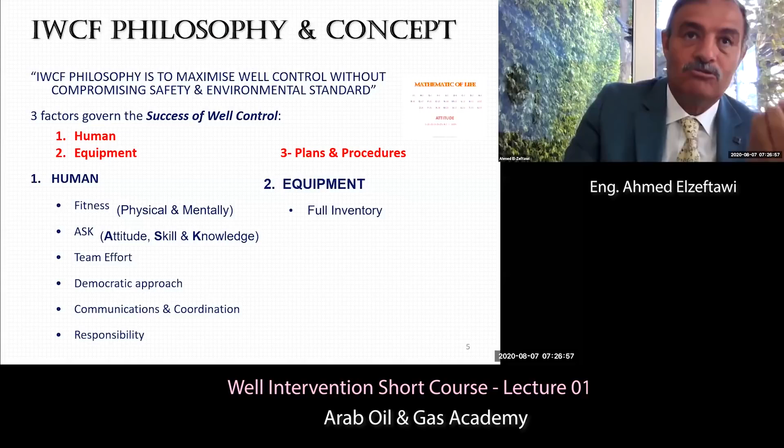If you still remember, we were talking about the three ways to keep good well control. We said number one is human, number two equipment, number three is plans and procedures. We talked about human quickly because of the time limit, and now when we talk about the equipment, I will not go through all these topics, but I need you to know that the equipment has to be in good shape. While going to the field, you have to know what you have.

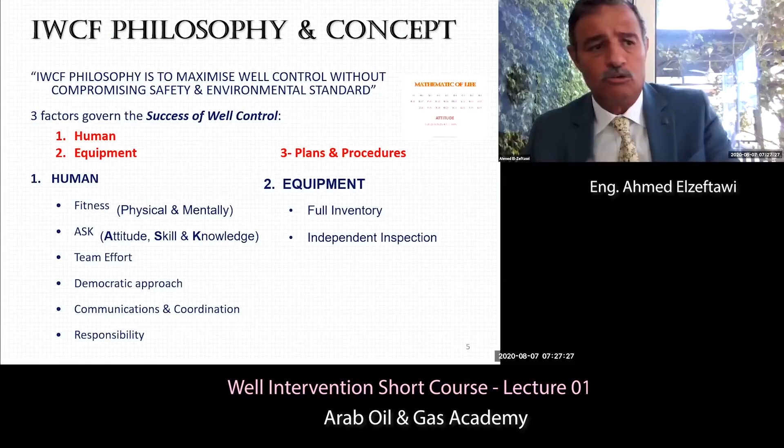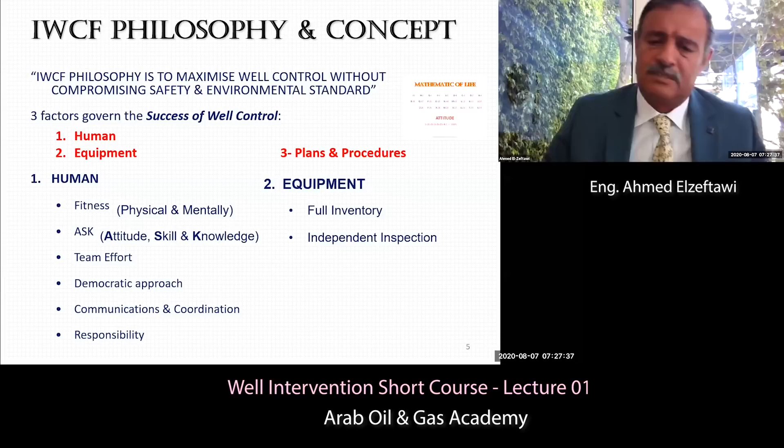And the equipment has to be inspected, not by you or by your friend or by a colleague, but your equipment has to be inspected by a certified inspection company. We inspect equipment against pressure test, we inspect all equipment. I'm talking about slings, about shackles, escape sets, breathing apparatus, fire extinguishers.

All these have to be inspected to be sure they are working correctly. I remember one day in the past, a service company sent the equipment to the location, ready to do the job. And before they did the job, the company representative went to the location to inspect the equipment before they started rigging up.

So the company man went through the equipment, and at the end he went to the supervisor and told him, thank you very much, please take your equipment and go home. And the guy was surprised because he hadn't made any mistake yet. He didn't even start the job. So what's the problem? We found it in the report that the company man sent to his manager.

He wrote that while checking the equipment on the ground, he found, I don't remember how many fire extinguishers on location, but let us say 8 fire extinguishers. He said that there are 8 fire extinguishers on location, but none of them is working, although all are certified. Certified means they have been inspected and they stick the stickers on the fire extinguisher that it has been inspected, and the next due is after 6 months.

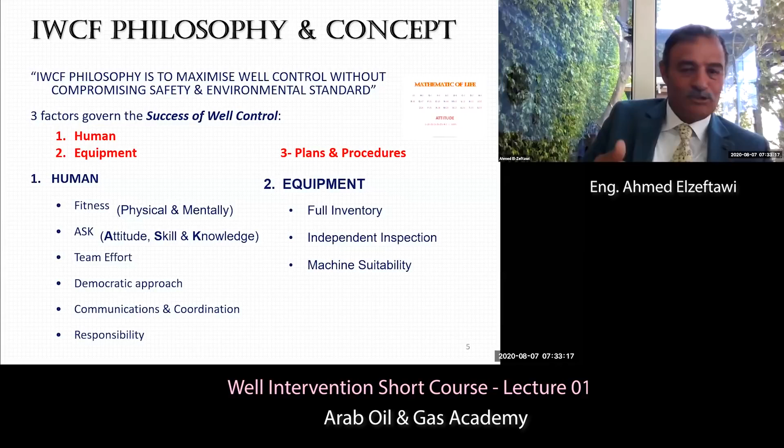Plans and procedures. You have to have a plan. That's why we have a program. When we do a job, we know exactly the steps, the 20 steps or the 30 steps we are going to do. And we have to have a backup plan. What if the original plan didn't work? What are we going to do? You always should have a backup plan.

We're going to pressure test and run in hole till we reach 12,000 feet. Then we're going to mix acid and inject it, pump it into the well. What if you mix this acid and you run in the hole and at 7,000 feet you cannot go through? What are you going to do with this acid you mixed already? Are you going to drink it? Throw it into the sea? You have to have a backup plan.

And these procedures you make are not a Bible or Quran that you have to implement in every well. Every well has its own characteristics, and every well has to have its own job procedures.

I'm going quickly because of time limitation.

Now we come to the barrier, which is the core of today's topic. What's the barrier? What kind of well service disaster could happen caused by pressure? And by the way, well intervention is about this word, pressure, P-R-E-S-S-U-R-E. If there is no pressure, then we have no problems. We can live safe. But pressure is behind every problem that happens in the oil field.

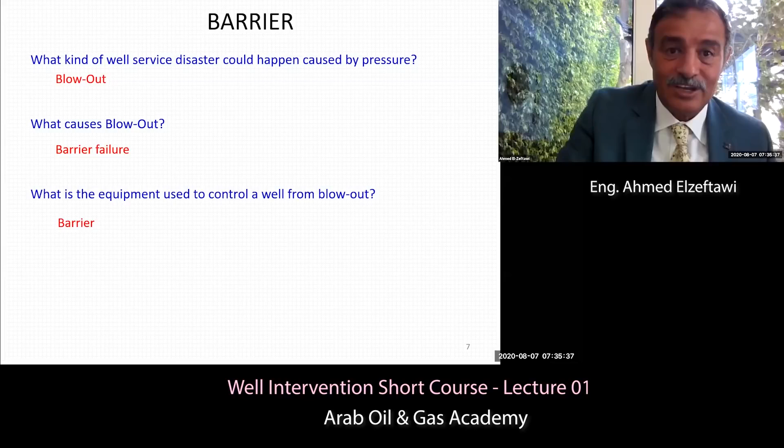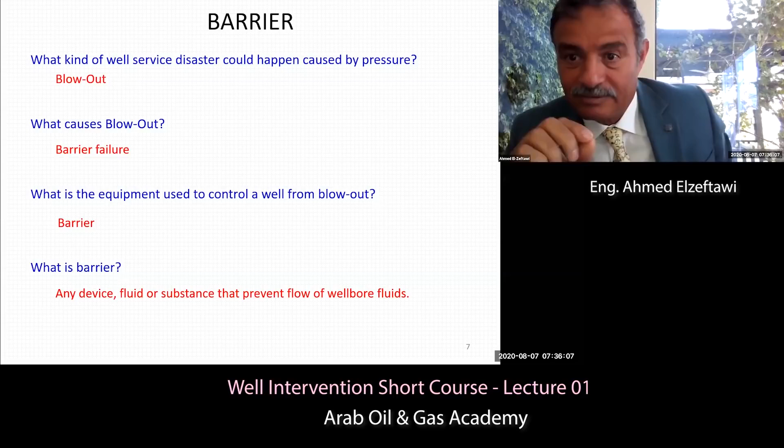What can pressure cause? It can cause a blowout. What causes a blowout? The barrier you selected didn't do its job, failed to do its job. What's the equipment used to control a well from blowout? Barrier, of course. What's the definition of a barrier? Any device, fluid, or substance that prevents the flow of the wellbore fluid. Please highlight prevent.

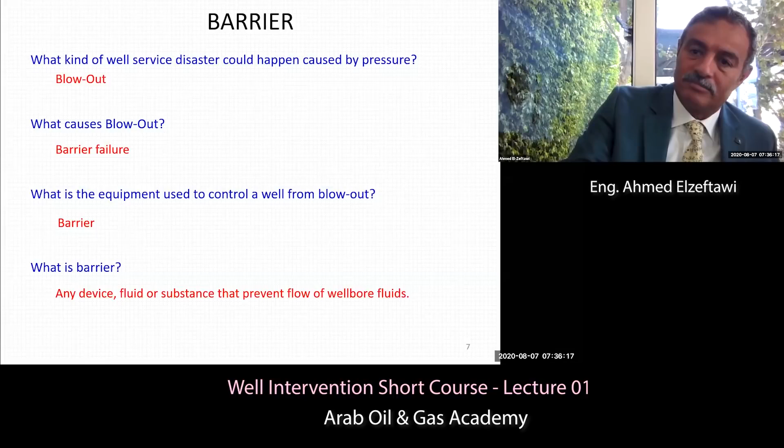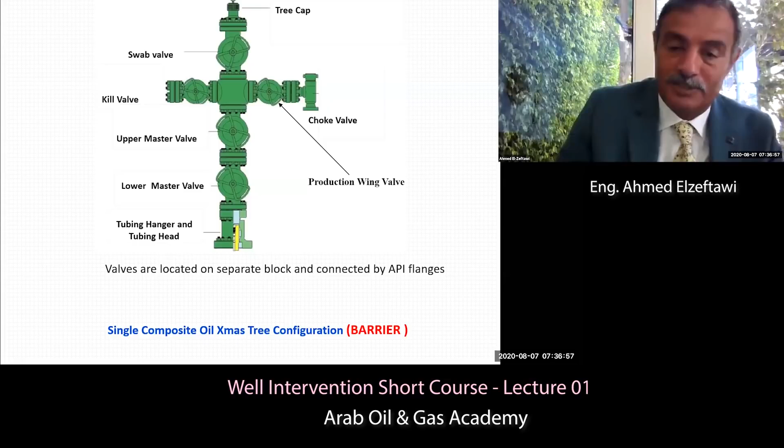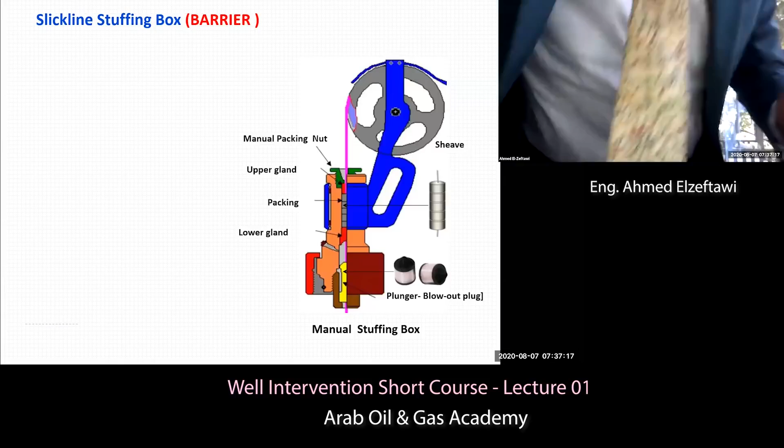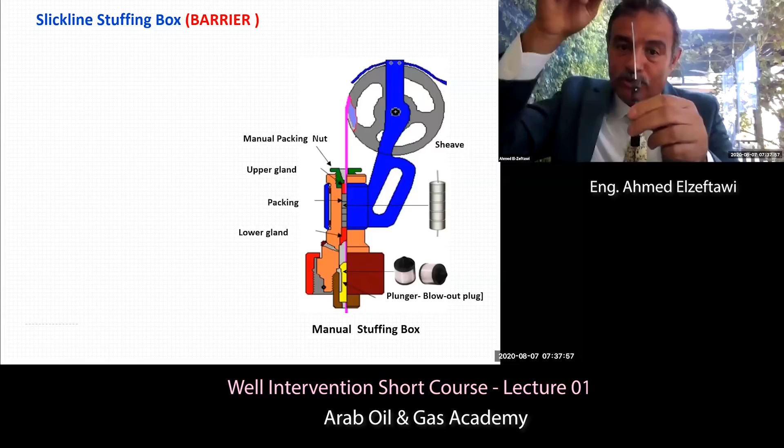What else? Slickline stuffing box. It prevents. How does it prevent? This is a slickline. We use this as a service to run tools downhole to do certain jobs. While running in the hole and pulling out of the hole, who prevents the wellbore fluids escaping to the surface? It is the stuffing box. What you see here is the slickline, and this is rubber packing. While you run in or pull out of the hole, this packing is squeezed on the wire, preventing well fluid escaping to the surface.

I wonder if you can see the difference in colors and shape of this packing, because each one is specifically made for a certain environment. The packing we use for H2S environment is totally different than the one we use for standard service. The one for low temperature is different from the one for high temperature, and the one for low pressure is different from the one for high pressure. That's why the selection of the packing is part of well control.

Many people actually don't know that. They just grab any packing and put it in, and then disaster happens. Because if you are working in an H2S environment and the packing you are using is not for H2S, the H2S will eat it in no time. Then disasters happen. Then your barrier failed.

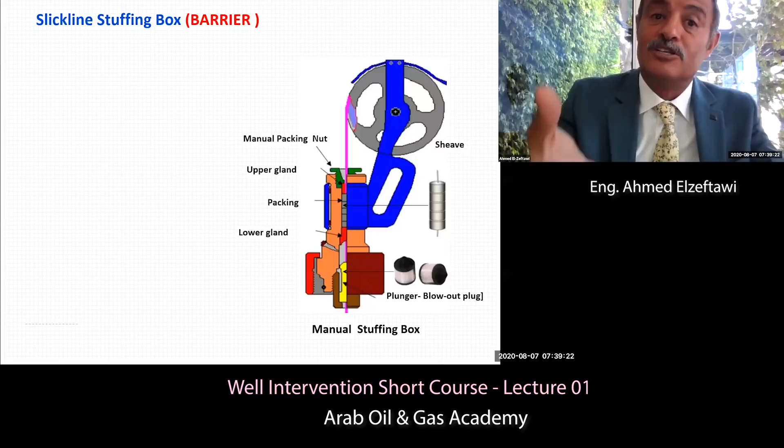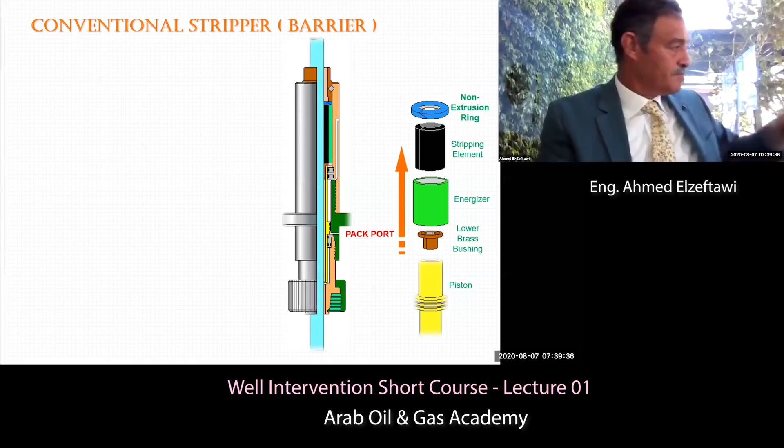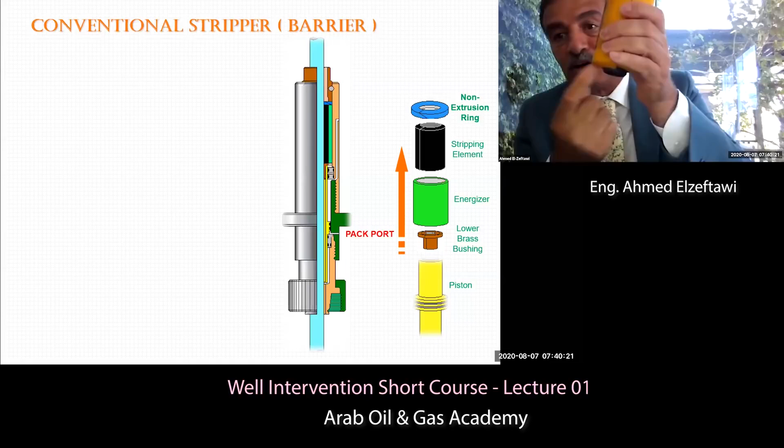Conventional stripper, it's a barrier. This is in coiled tubing. This is a piece of coiled tubing. While we are running in the hole, what prevents the escape of wellbore fluid from the annulus here? It is the packing. This packing is to seal on 1 1/4 inch. Initially I grabbed 1 1/2, so it doesn't fit. That's why I had to return it and bring 1 1/4 inch. Now it seals. I can run in the hole, pull out of the hole, and this rubber will prevent the escape of wellbore fluid to the surface.

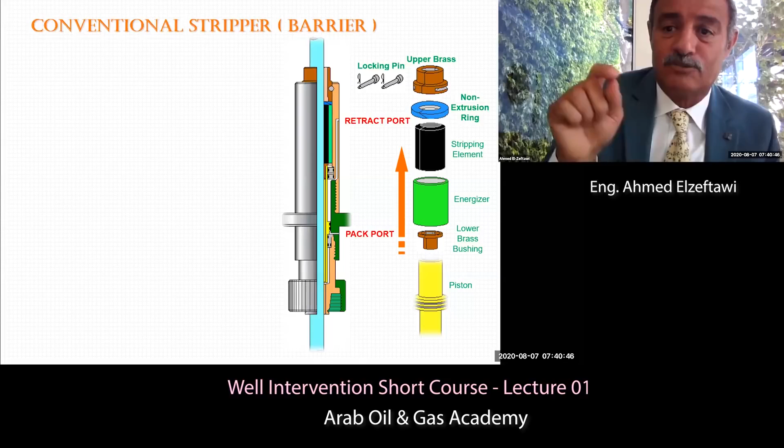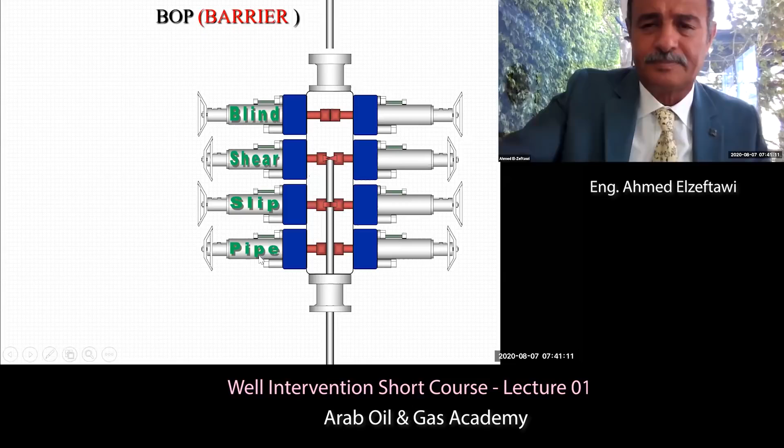What else do we use as a barrier in the oil field industry? The BOP. BOP stands for blowout preventer. As you see now, this is the pipe inside the blowout preventer going into the well, and we have these different rams: pipe, slips, shear ram, and blind ram. The last one is the pipe ram. This is the pipe ram insert. You see this groove; it matches the size of the pipe. If the pipe is 1 1/4, this groove matches 1 1/4.

So when we close the ram, what's inside the BOP here, we'll go through this in maybe session number 5 or 6. This is the ram itself, and this is the ram insert. This is one piece, and we have another piece on the other side. When we close, it goes like that. Because it's too heavy, I'll put it down. Then it will seal around this pipe, preventing the well pressure escaping to the surface.

And if we don't have pipe in the well, then we have number 1 here, which is the blind ram. This blind ram is blind. It has no profile, because when you close, it seals on itself, preventing the well pressure escaping to the surface.

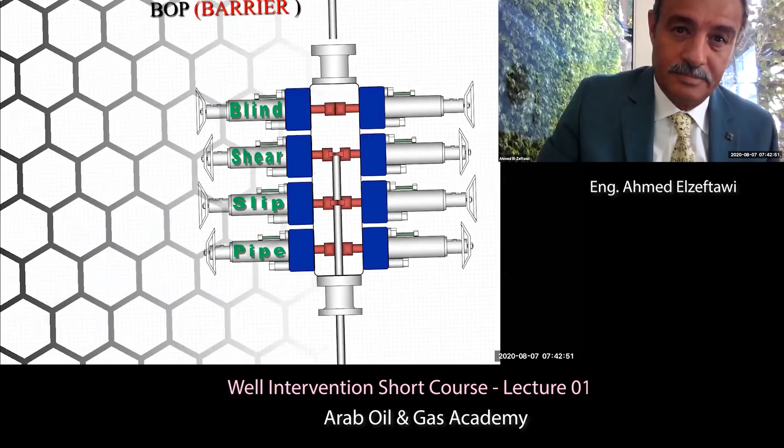So a BOP is a barrier. Shear seal BOP is a barrier. Shear seal, we call it safety head. And this is normally the first thing we put on top of the Christmas tree. And from its name, it's shear and seal.

This is how it looks like. When you close, if there is a pipe, it will cut the pipe and then continue movement, and it seals on itself, preventing at the end the well pressure escaping to the surface. So shear seal is a barrier. Yes.

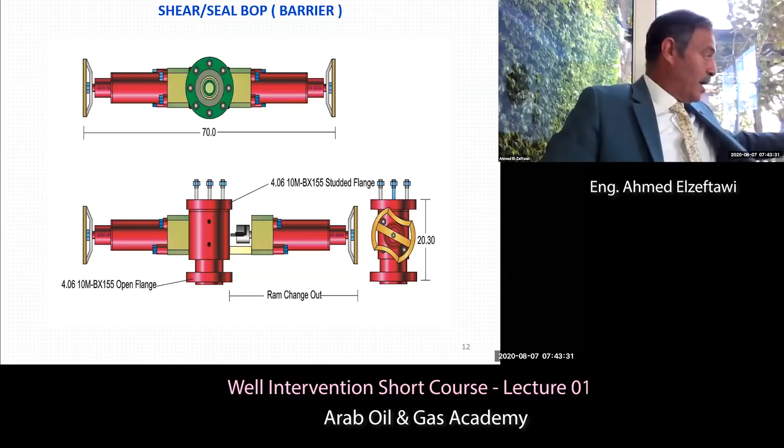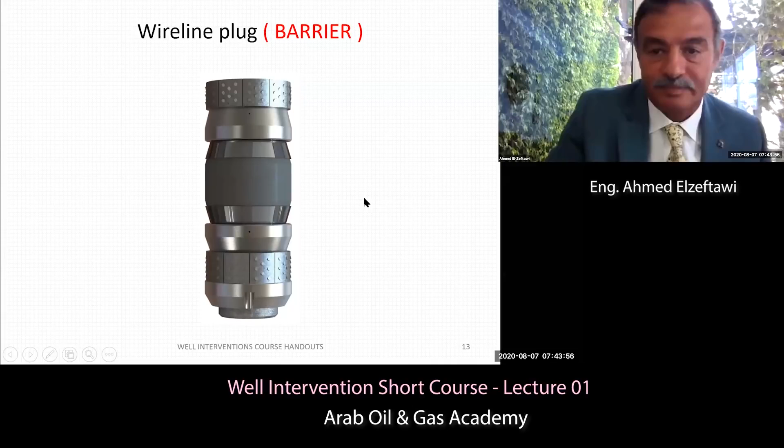Wireline plug. Wireline plug we use to run it with the slickline. It goes through and sits on a particular landing nipple to prevent the escape of wellbore, and what prevents it actually is the rubber. You see it here. So wireline plug is a barrier.

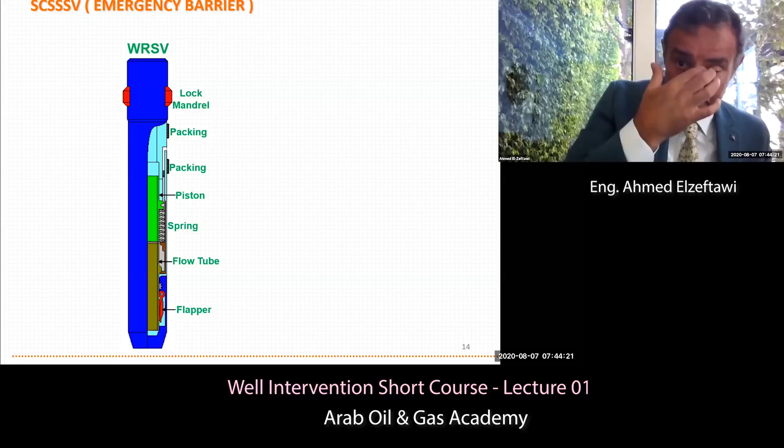What is this? It is surface control, what to call it? It is surface controlled subsurface safety valve. Downhole safety valve, we commonly say it. The downhole safety valve, you see it here. When you run it in the hole, it prevents, because it has a mechanical device that closes in case of emergency. This is the landing nipple of the downhole safety valve, and this is how it looks like when you run it and sit it inside the nipple.

It seals and prevents, but we call this an emergency barrier. What's the difference between the barrier and the emergency barrier? Goodness.

It's like when I come here today, I have $300 in my pocket. I have $200 in my wallet. If you ask me how many dollars you have, Ahmed, my answer is 300. Come on, Ahmed, you have another 200 in your wallet. Yes, but I don't deal with it. I live my life with the 300 in my pocket.

When will I consider the 200 in my wallet? When you put the knife on my neck, I will give you the wallet, trousers, the shoes, my watch, everything. So this is emergency, but I live my life with the 300.

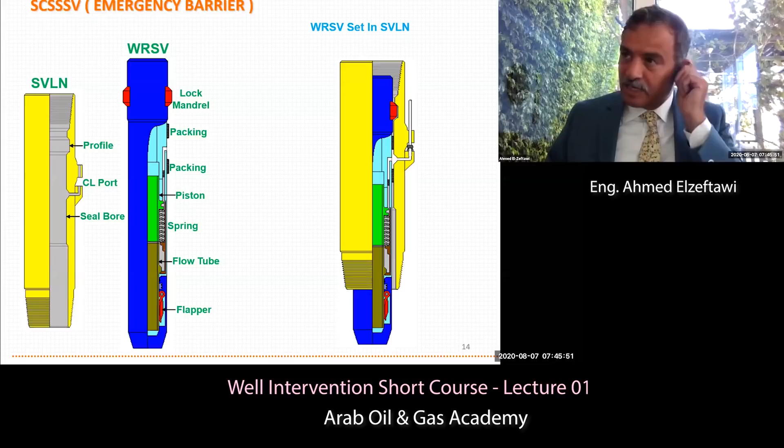That's why when we go to the oil field, work on a live well, let's say we need 3 barriers. When you count the 3 barriers, you don't count the downhole safety valve. You say, okay, the 3 barriers I have are the Christmas tree, the stuffing box, the BOP, yes. But don't count the downhole safety valve because it's not a barrier. It's an emergency barrier. You have to have it, but don't count it.

Barrier classification. We classify a barrier into 3 categories: primary barrier, secondary barrier, tertiary barrier. Normally, when we start the job, we start with the primary barrier. This is the primary barrier. We are running with the slickline. While running in the hole, what prevents the wellbore fluid escaping to the surface? It is the stuffing box packing. So this is the primary barrier.

If it failed, then we have to use the secondary barrier. Failed means what? Leaking? Leaking means fail. Because if this is leaking, there is friction, of course, between the metal and the rubber. So the metal eats the rubber. So if this happens, there will be a gap, allowing the escape of oil or pressure to the surface.

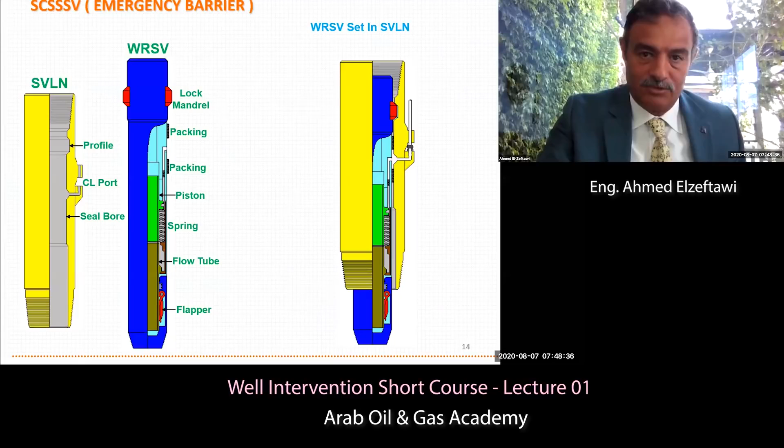It is the BOP, blowout preventer. So you apply a blowout preventer. And when you apply the blowout preventer, you apply it hydraulically, then mechanically. If we go back to the BOP, you will see here it has wheels. You see these wheels? After you close hydraulically, you go to the BOP and close it manually.

The reason for closing manually is preventing the ram, if there is a leak in hydraulic oil, from going back. If it goes back 1/10 of a millimeter, a blowout will happen. But remember, never go to the Christmas tree area to close these wheels if the well is not safe, if the condition is not safe. If there is a gas leak, never go there. Do not close it by hand.

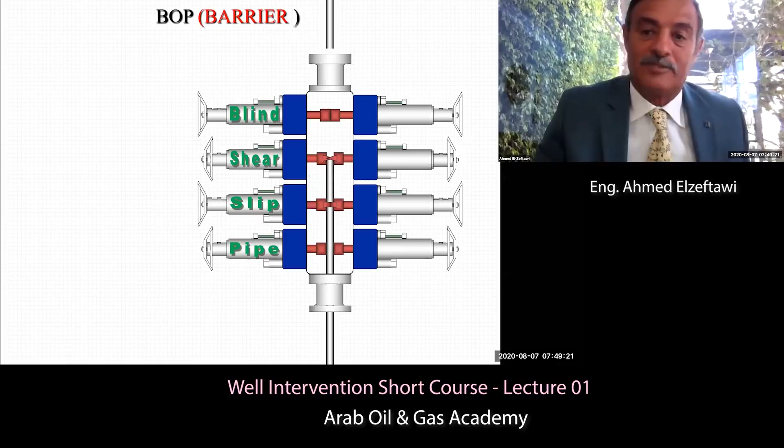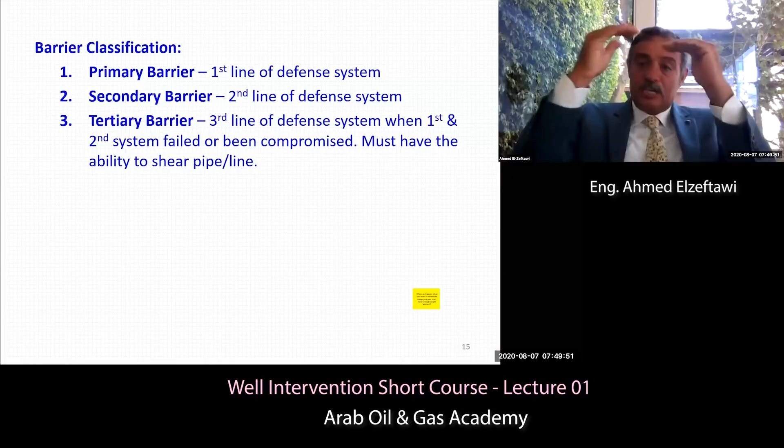So if the primary barrier fails, we go to the secondary barrier. If the secondary barrier fails, we go to a tertiary barrier, which could be the Christmas tree, could be a shear seal BOP, based on the configuration you have in your rig. But this is the sequence. You go primary, if it fails, you go to secondary, if it fails, you go to tertiary.

I don't believe that 45 minutes already approached.

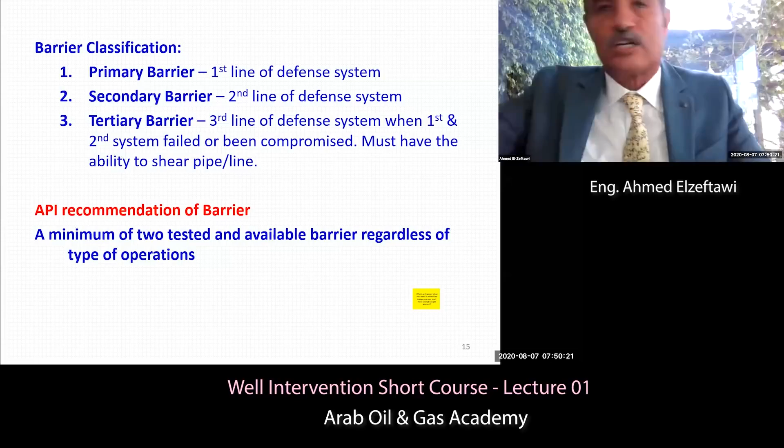What's the API recommendation for barriers? The API says a minimum of 2 tested and available barriers, regardless of the type of operation and regardless of what you are doing. You are drilling, you are doing coil tubing, wireline, production phase, minimum 2 barriers. Regardless of pressure, even if the pressure is 0, a minimum of 2 barriers you need.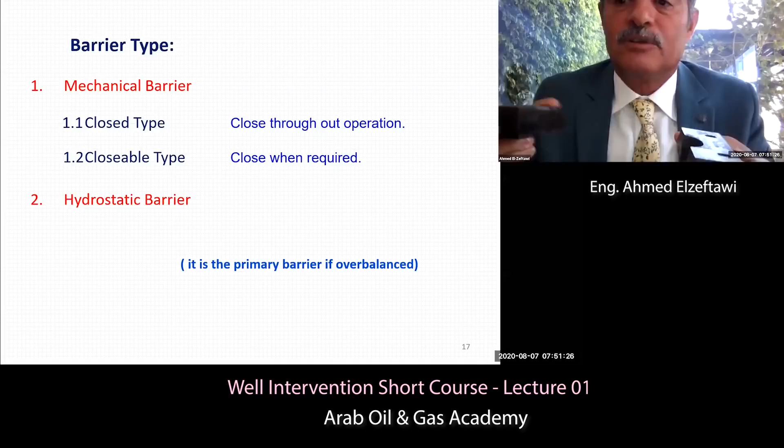But the closable type is like the BOP. If you remember, this is the BOP ram. During the operation, by default, this is open. You close it when you need it; if the primary barrier fails, then you need it to close around the pipe to seal and prevent the escape of the well.

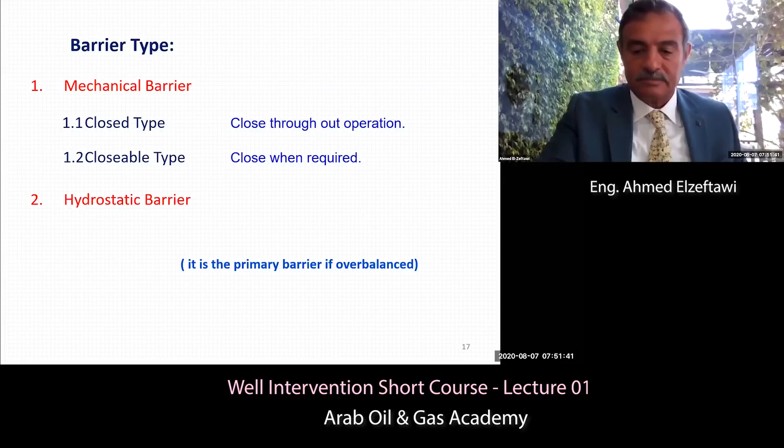Hydrostatic barrier, it's a liquid. Remember, it's not a fluid, it's a liquid. There is a big difference between liquid and fluid. Fluid is the holding company, where below it is either liquid or gas. You cannot use gas as a barrier. It doesn't create a hydrostatic head. So a hydrostatic barrier is a liquid that creates hydrostatic pressure greater than the formation pressure.

I cannot stop there because this statement is wrong. Otherwise, formation pressure is 3,000, you will create a hydrostatic head of 6,000. It is greater than the formation pressure, but this will kill your well dramatically and damage your formation. But then we said within 200 to 300 psi, and it has to be monitored all the time. The hydrostatic barrier, the moment you lose monitoring, it's not considered a barrier. You have to monitor it all the time.

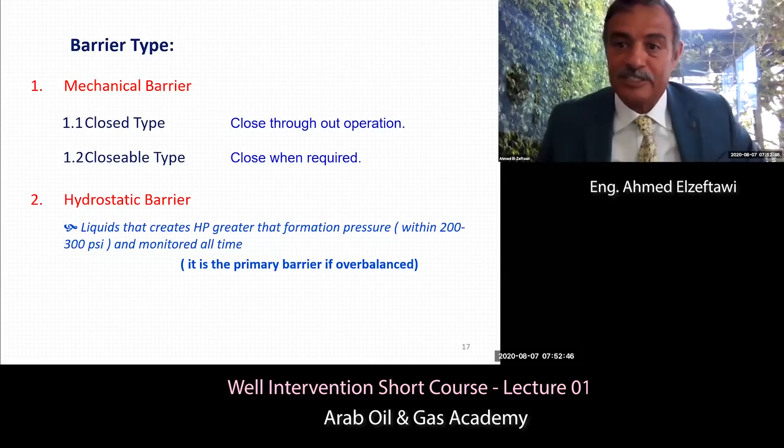I'll skip this as well. Any barrier, when we test it, we have to test it from the direction of flow. Direction of flow. You cannot test this BOP blind ram by closing it and testing it from above. Why? Because what's the reason for having it? When you close it, you need to prevent the escape of pressure from where? The direction of flow. And actually, it is not designed to withstand pressure from above. Not designed for that.

You have to use the equipment for what it is designed for. I always say that we design a ladder so you can put it on the wall, go up to change the bulb on the ceiling and come back. But then you can tell me, okay, Ahmed, I can use the ladder as a bridge between 2 tables. And to prove that, you put it across the 2 tables, you walk on top and you reach the other table. You see? Yes, you can do that.

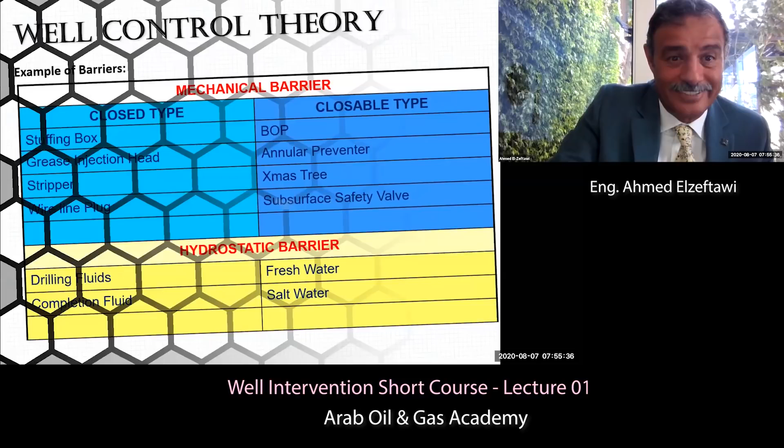Why am I skipping these slides? Because I couldn't manage my time and the 45 minutes passed already. So I am poor in that. Formation damage.

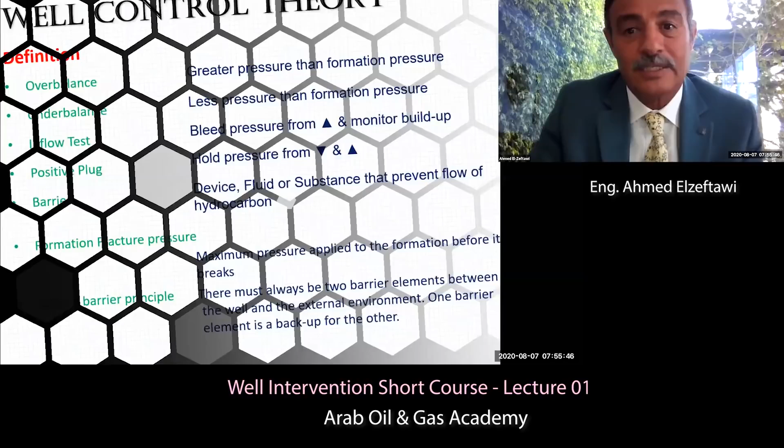What damages a formation? I didn't hear you.

A formation can be damaged. There are so many reasons that can damage a formation, but actually, the two main reasons are pressure and fluid. When I say pressure, I mean exceeding the formation fracture pressure. If the formation fracture pressure is 3,000 psi and you pump with a pressure of 4,000, you will break the formation.

A formation is not a glass to break, but by breaking the formation we mean that the formation downhole is grains, right? And these grains are in contact. There are gaps between these grains. You cannot see these gaps with your naked eye; you need a microscope to see them. And there are links between these grains. So now, the distribution of these grains is stable at a certain pressure.

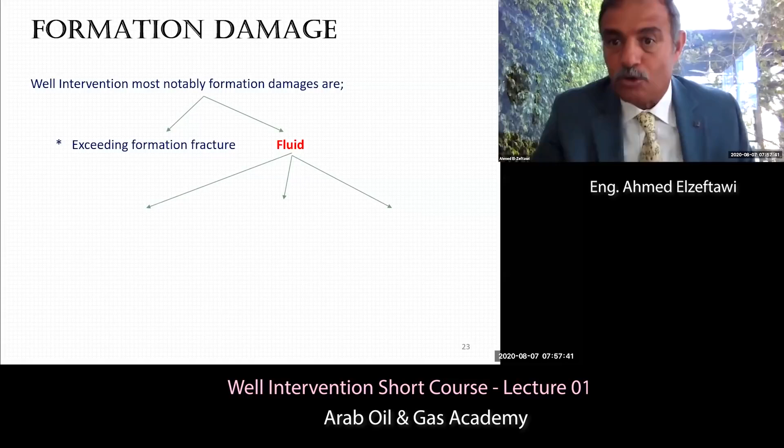Let us say 3,000. If you exceed it, you're going to break these unseen links between the grains, and they will start to move apart from each other, regardless of horizontally or vertically. The moment you stop pumping, what will happen? The formation will fall down, will collapse, removing these minor gaps you see by microscope, preventing the flow of oil through the wellbore all the way to the surface. You damage the formation by exceeding.

But actually, sometimes we do these jobs. We do what we call a frac job. A frac job is a fracture job. Actually, you intend to frac the formation. So you have a formation pressure of 3,000 psi, and you pump with 7,000 or 8,000 psi. You intend to break the formation, but you do it with knowledge. Before you stop pumping, you fill these gaps you created.

You fill them with artificial formation. Now, when you stop pumping, the original formation cannot go back because you already filled this space with proppant, which is artificial formation. The advantage of the proppant is it has high permeability. So instead of the well producing 1,000 barrels a day, it will produce 2,000 or 3,000 barrels a day. You do this intentionally, but you know what you are doing. So exceeding the formation fracture pressure will create formation damage.

Number two is the fluid. When we talk about fluid, we mean pressure, which is already mentioned in number one, and compatibility and cleanliness. Compatibility: the fluid you are pumping into the well has to be compatible with the formation. This is glass. I can fill it, I can put acid, no problem. But if this is steel, I cannot fill it with acid because acid will eat the steel.

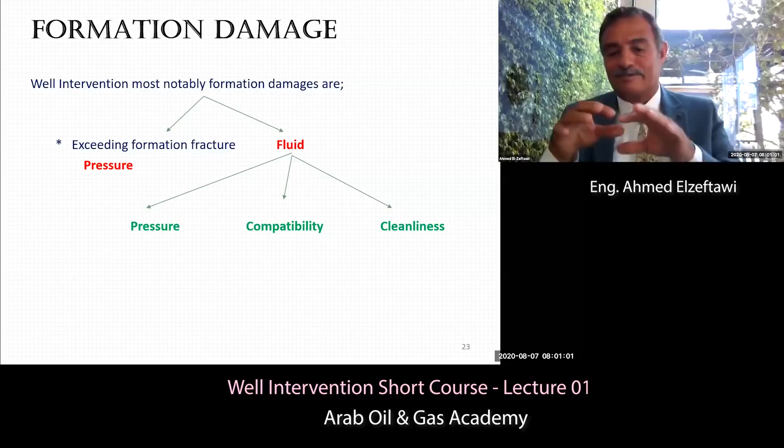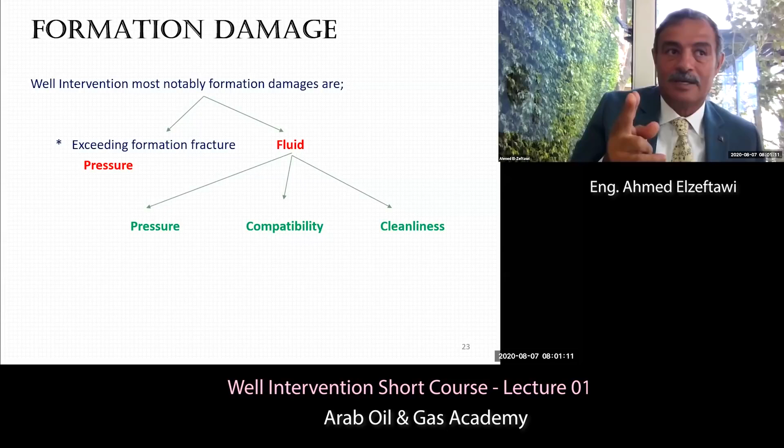The fluid we pump has to be clean. Clean means it doesn't have any rubbish, any scales, any debris. Otherwise, it will go through these channels in the formation and block them. That's why with injection wells, we always have a filtration unit, either by the pump station or near the well itself.

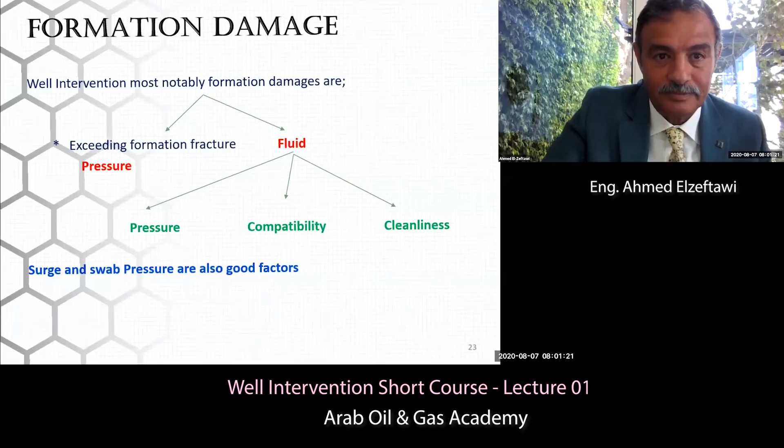Well killing. There are so many ways to kill a well, but before we go through well killing, let us go through why we kill a well. Why do we kill a well? I need an answer from you guys. You have to think why we need to kill a well. You might have a specific answer, but the general answer is if you have a problem and you need to stop this monster, which is the pressure coming through, you kill the well.

But keep in mind that killing the well is not that easy to do, nor to decide that for any problem that happens, the solution is killing the well. Actually, killing the well is the last solution you use to solve your problem. If you read the book, How to Solve Your Problem, your problem is on page number 18.

Then you go to page number 18, you see your problem, and then it tells you, okay, the answer is page number 19. You go to page number 19, how to solve your problem, you will see 1, 2, 3, up to 10. Number 10 is killing the well. It's not number 1. The first solution is not killing. Killing is your last solution because it costs you a lot. Not in killing, actually, but after that, when you need to reinstate production from the well. So keep in mind that killing is your last solution.

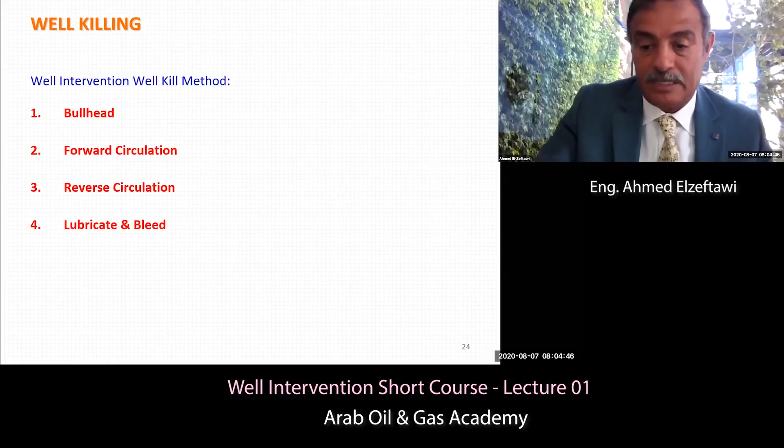So when you have a kick, you decide to kill the well as a last solution, not as a first solution, because there are a couple of things you have to do before that. Many ways of killing the well. I will go very quickly in well killing, and we'll talk about the methods: bullhead, forward circulation, reverse circulation, lubricate and bleed. Let's talk about the bullhead method.

The bullhead method is pumping kill fluid through the tubing and squeezing the influx, which is normally the light gas, into the formation. We use this method in emergencies, when time is very critical, because this method does not need time to kill the well. Normally, the well is dead between pumping one tubing volume and double a tubing volume.

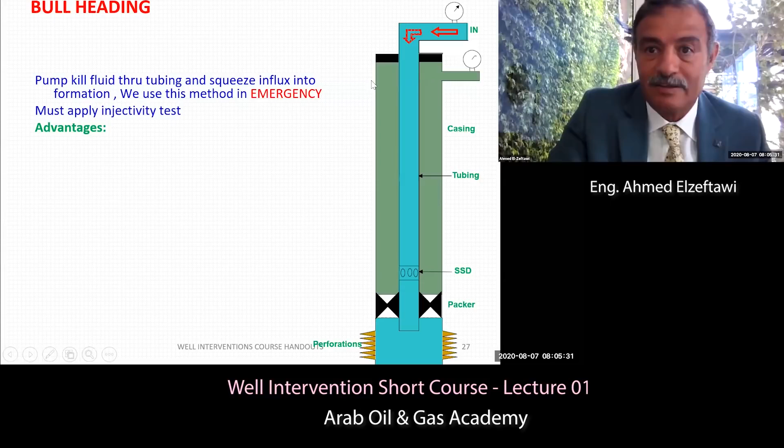There are limitations on using this method. As you see, we pump kill fluid into the tubing, and we squeeze this kill fluid into the formation. There is no circulation whatsoever here. It is squeezing. The limitation we have to this method is the formation fracture pressure; we cannot exceed the formation fracture pressure, otherwise we break it, as we discussed. The tubing burst pressure.

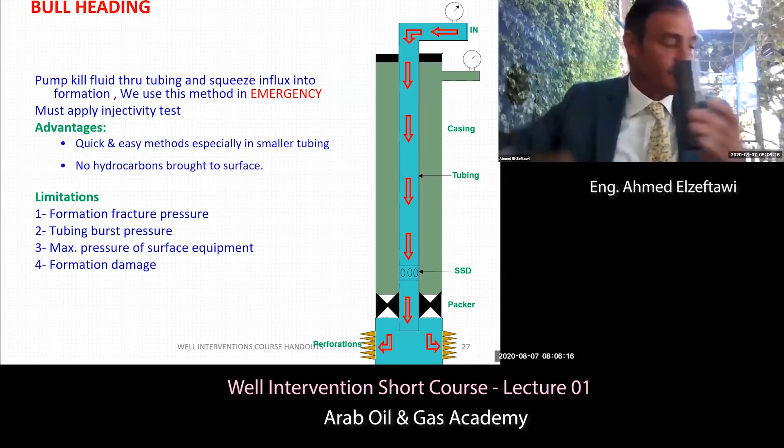This is a pipe. You are pumping through this pipe. So this pressure exerts on the walls. If you exceed the burst limit, this will balloon and then it will burst. The internal pressure. So we care about the burst pressure. You should not exceed the burst limit. And this pipe, if it comes from the factory telling you that the burst limit is 5,000 psi, do you believe it's 5,000 psi over the whole period of its life? Come on. Of course not.

The life of everything goes like that. Nothing is going up. It's going down. And you have to calculate. Can you? Yes, but this is not the course to talk about it. But it is never 5,000 anymore because you have to degrade it every time due to erosion and wear, and so tubing burst pressure is the limit.

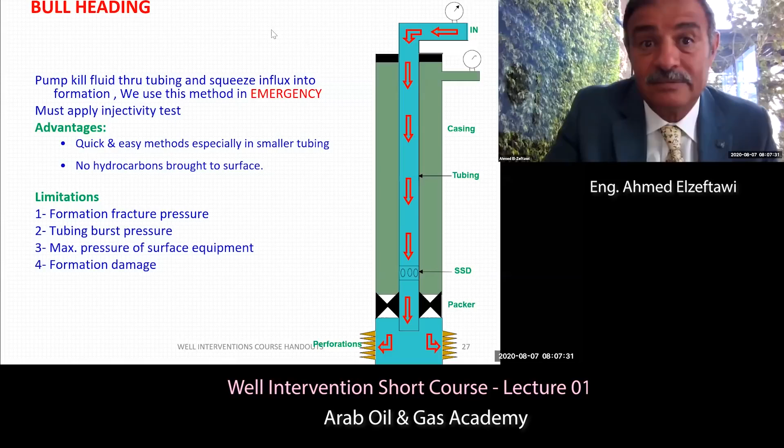The maximum pressure of the surface equipment: if you have a Christmas tree rated for 3,000 psi, this is the maximum pressure you can apply. Your pumping pressure cannot exceed the rated Christmas tree pressure. Formation damage, which is one of the weak points of this method. Formation damage. How? Remember, we said that we are now pumping, squeezing.

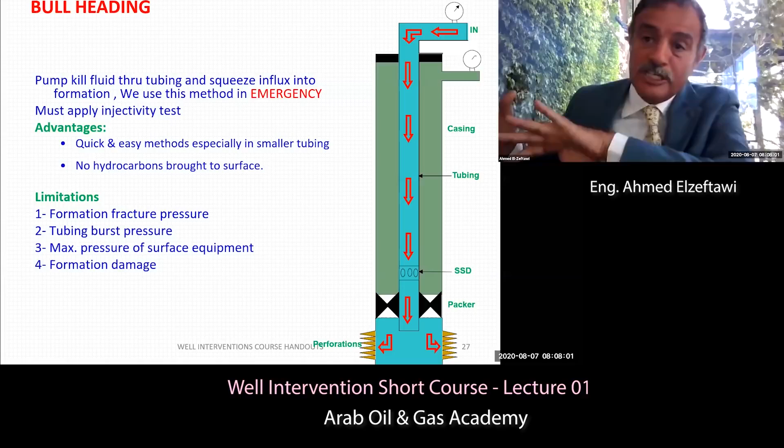If this well is not new, what will be downhole here? Do you know? Let me think. Oh, okay. There will be scales, paraffins, wax, spanners that you dropped while doing work, O-rings, ring gaskets. So you are pumping all this, squeezing all this into the formation, blocking this formation, damaging this formation.

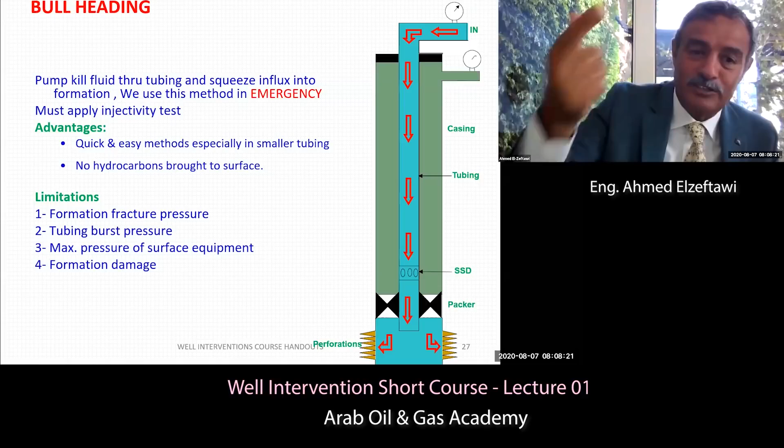The only thing I need you guys to know about bullhead is that it is one of the kill methods. We use it for emergencies because it doesn't need time, actually. And for the limitations, we have 4: formation fracture pressure, tubing burst pressure, the maximum surface pressure of the equipment, and formation damage.

Ahmed: But this is not a killing method, this is a circulation. So what? What is the aim of killing? Me and you, what's our target? It is to have 0 pressure in this pressure gauge. You see it on top. Regardless which way I go, at the end, if this is 0, then we reached our target.

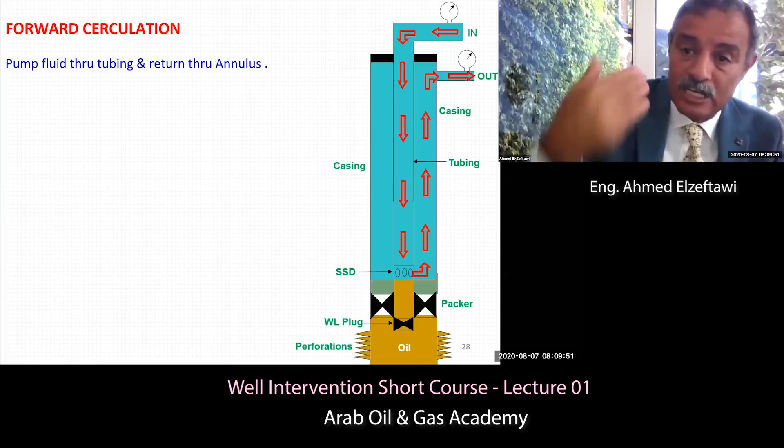The reason we put the wireline plug at the bottom here is to prevent the killing fluid from reaching a formation that it might damage if it is not compatible with the formation. So this is the only reason we have this plug, as you see it. So by doing this, we are replacing a light fluid in the tubing with a heavier fluid. It creates hydrostatic head pressure greater than the formation pressure.

This method is not recommended because it has disadvantages actually. One of them is that at a certain stage when you pump, you will have this light fluid or gases that's in the tubing in the annulus here. Having it in the annulus here is dangerous. Why? Normally we fill this annulus with fluid. The reason we have this fluid is to create hydrostatic head. It helps the packer, which is here, as you see, from being unset.

How will this packer be unset? From the pressure below it. The well pressure is always pushing, trying to push the packer upward to unset it. What prevents the packer from being unset? Number one, the ability of the packer to withstand this pressure. That's why when you buy a packer from the supermarket, you buy either 2,000 psi or 3,000 psi or 4,000 psi based on the condition of your well. We don't buy packers from the supermarket, I know.

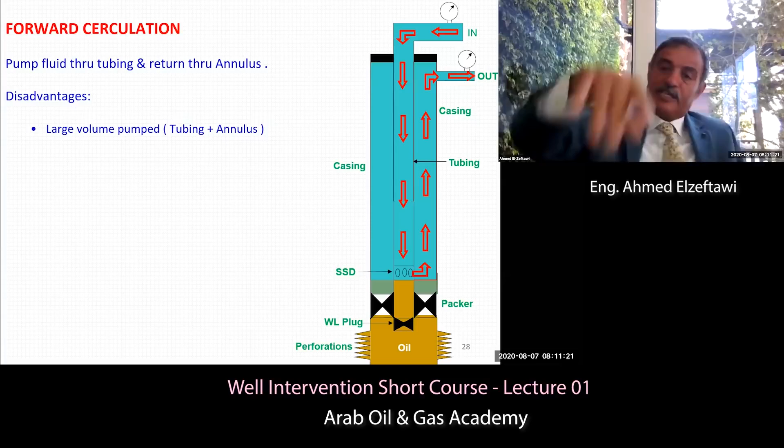But number two, what prevents it from being unset is if there is something on top of it holding the packer from being unset, which is the hydrostatic head of this fluid. So by moving this gas from the tubing into the annulus, this gas will reduce the hydrostatic pressure to a limit where you are gambling on unsetting the packer.

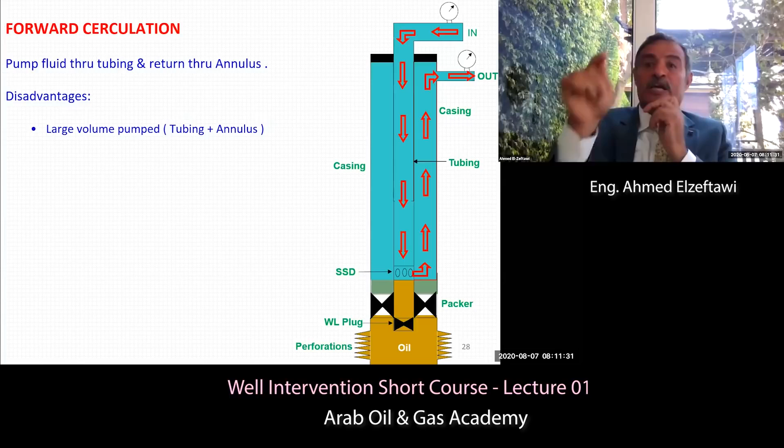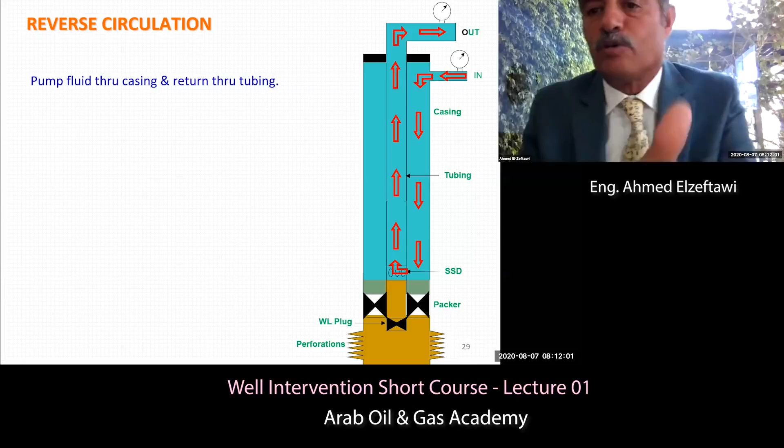Am I going too fast? Yes, I'm doing that.

The last method is the lubricate and bleed. The lubricate and bleed is the method that we use to pump a small amount of kill fluid and bleed a small amount of gas while keeping bottom hole pressure constant. The way we do it is, if we have a kick, normally we go all the way down and have a complete circulation with a clean mud. After we do that, we close the well. If these gauges still show pressure, that means it's a continuous kick. Then we have to kill the well.

By doing what? By pumping a small amount of kill fluid, like 1 barrel, and wait till this 1 barrel goes through the tubing all the way down to the bottom. The name lubricate and bleed came from that, because this 1 barrel or 2 barrels you pump lubricates through the original fluid and goes all the way through. And then open the valve at the surface to bleed a small amount of gas and close. Then pump another barrel, wait till it goes all the way down, and then bleed off a small amount of gas. You do this till all the gas is out.

I need to tell you that during the production of a well, what's the media inside the well? It is salad. Salad means it's cucumber, tomato, onion, oil, salt. It's a mixed ingredient. It's oil, gas, and water. This will be present in every single point inside the well.

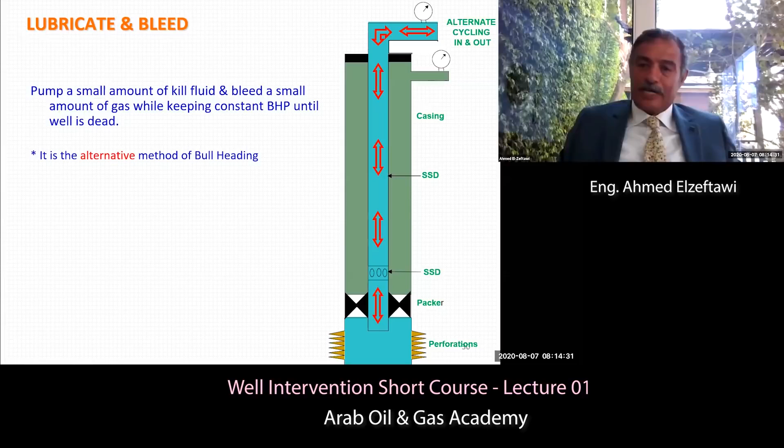But the moment you shut in the well, you change the condition from flowing condition to static condition. By doing that, this mixed grill, or this mixture of fluids, will separate based on the density. So water will be down, above it will be oil, above it will be gas. This does not happen in a moment.

It takes time, because this bubble of gas, which is 1,000 feet away from the surface, will take maybe half an hour while traveling. But these bubbles of gas which are 10,000 feet below will take maybe 2.5 hours to reach the surface. So this accumulation of gas at the surface creates what we call a gas cap.

So when you shut in a well, the pressure will go quickly to maybe 900 psi. And then we go to a cafe, have a cup of tea, and then we come back after 1 hour. This 900 will not be 900. It might be 1200. And then you monitor: 1210, 1220, then 1250 and it stops. The well is stabilized. The water, oil, gas separation is done already.

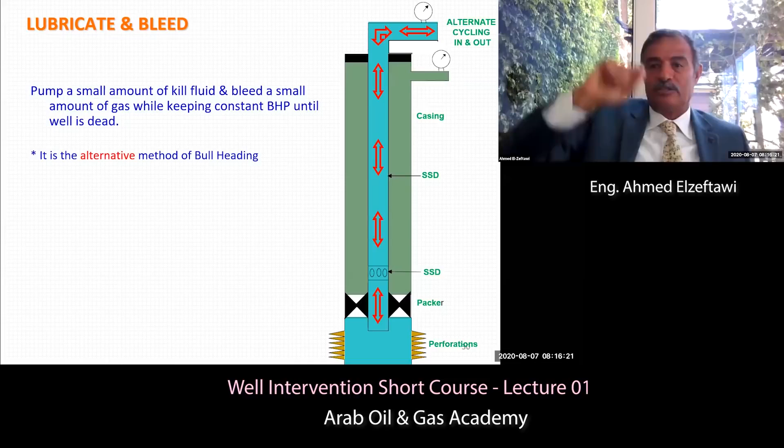There are 2 stages you will notice when you shut in the well. The first thing you notice is an increased pressure. This is due to formation buildup. Then you will see an increased pressure over time. This is due to gas migration. So the first stage of shut-in is the formation buildup, which makes the pressure go rapidly high. But the second stage, the gas migration, goes slowly up over a period of time, not a short time.

And the word relatively I put here in red. Why? If I say high pressure, then in your mind it is 10,000 or 15,000 psi. But this is not correct. Hydrates might happen at 2,000 psi, because 2,000 is relatively high to the circuit. If the circuit pressure is 1,000, then 2,000 is very high. Same thing, if I say low temperature, maybe you think it is 0 or below, but hydrates will happen at 17 degrees centigrade, because it is relatively low compared to the system. If the system temperature is 20, then 17 is relatively low. If these 4 conditions exist at the same time, at the same point, hydrates will form.